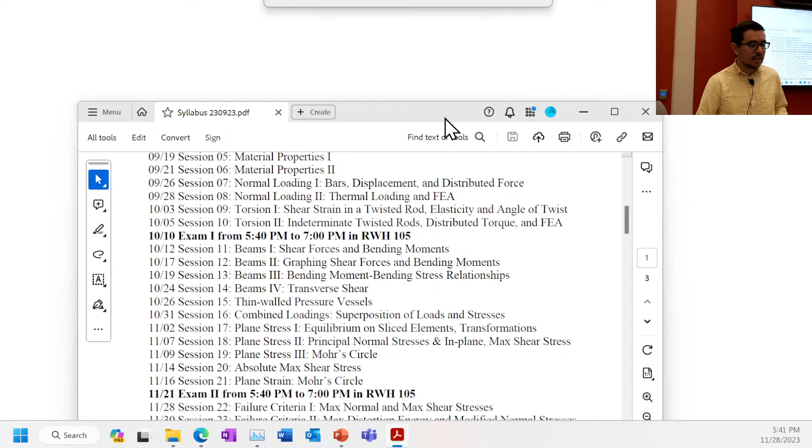All right, so administratively, we'll pull up the syllabus just for a minute to show us where we are and the progress we're making. As you know, we had exam 2 last week, and today we're going to do session 22 on failure criteria, and we'll talk some more about failure criteria on Thursday as well. Then we enter the home stretch. We have sessions 24 and 25 talking about beams, essentially. Key concepts we've talked about quite a bit: the stresses in the beam, transverse shear stress, the bending stress, and finally we'll get to figuring out what the displacement is. You'll be able to use tables you can find on the internet to do rough estimates for deflection. The last day of class will be the 12th, and then we'll have a review, talk about things, answer questions. But that's kind of what we're planning. All right, any questions on this?

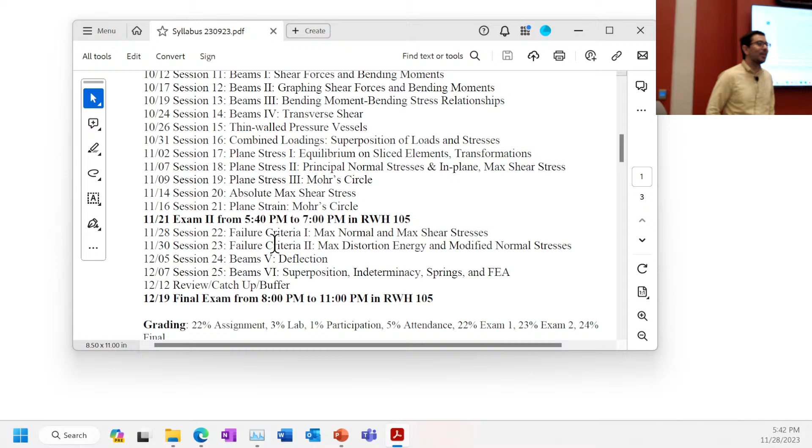Okay, I didn't know that was a way to get everyone quiet, by asking if there were questions. Yes? Do you have office hours between the 12th? Yeah, we can have office hours, sure. I'm not sure which days those would be, but I'll keep my normal office hours until we have the big one.

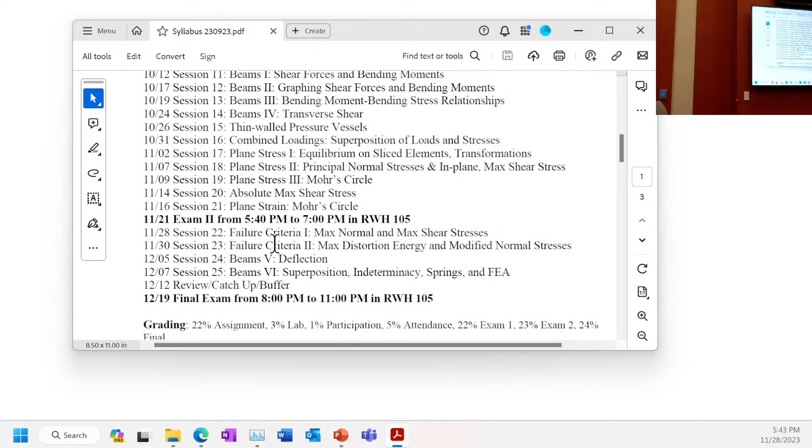Okay, any other questions? Are you okay, Jesse? You're looking at me with this face. I don't know, I was getting a vibe. Alright, okay, alright, so let's go. If I can get this off. Okay, and we'll come over here. Alright, yes, we're in it.

Okay, so today what we are going to review is a little bit about material testing and ductility. We've talked about these principles already. It may have been a little while ago, but you should be pretty familiar with them.

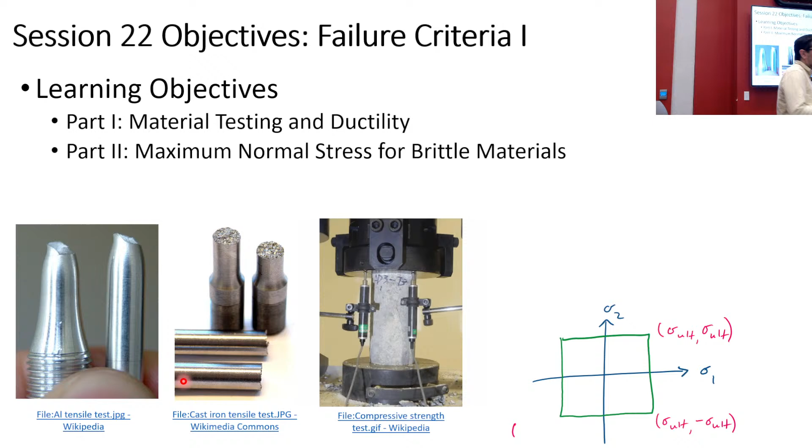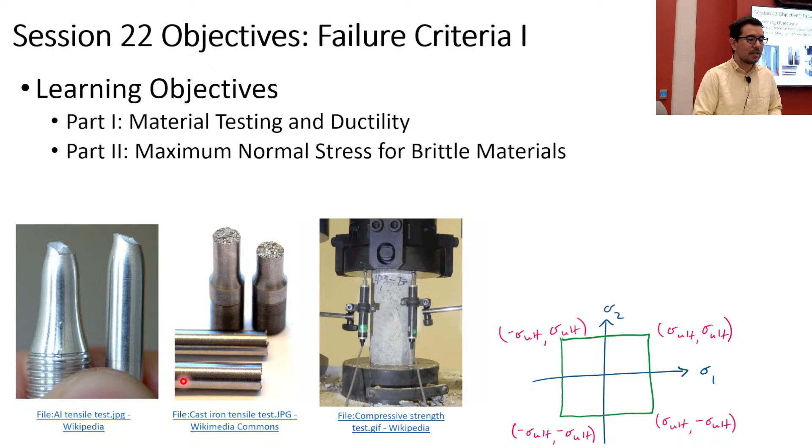And then we will talk about one criterion for deciding if something is going to fail, and that is using maximum normal stress. It's particularly useful for brittle materials, although, as we will say multiple times today, when you're looking at brittle materials and trying to figure out if they're going to fail catastrophically, be generous with your safety factor. There's a lot of variability, okay? But nonetheless, we do have some guidelines and some principles, and maybe a little demonstration too.

And then we'll get into maximum shear stress, which is applicable to ductile materials. Yes, Federico. Does it happen to be the chalk, the demonstration? Yes, it does happen to be the chalk. Have you seen this demonstration before? I'll find out. You'll find out. Okay, wonderful. All right, thank you for foreshadowing our demo.

So let's get into tensile testing, material testing, compressive tests. If you had to think about this, what would you say is the purpose of characterizing a material in a material testing machine? Why do we do it? Yes, Kevin: to see which materials are better suited for what kind of tasks and under what kind of loads and conditions. Okay, so to see which materials might be suitable for the anticipated loads we are going to have in our situation. Sure, okay.

Other thoughts? More specific ideas? Why do we test materials? Yes, Federico: to make sure they're safe when they're going to be used for their actual purposes, so no one gets injured. Right, so we're concerned about safety.

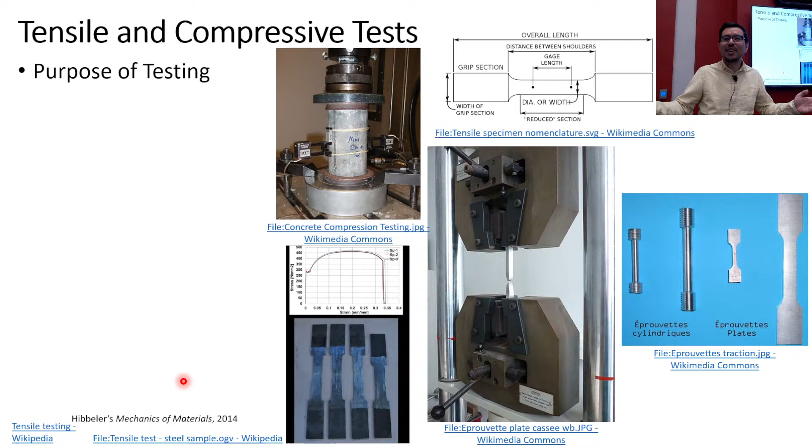Okay, and does this mean that if I'm going to build a table, do I put the whole table in the material testing machine to see how it's going to behave? I wish, right? We could get rid of this whole class if all you had to do is build it every time and have enough resources to test it every time. If it works, it works; if it doesn't, it doesn't. That would be a good way to go with infinite resources, okay.

So one of the things that we care about is figuring out what the intrinsic properties, the material properties are, so that we have an idea of the stresses and strains the material can handle before it fails or yields, right?

We also care about stiffness of structures, so we also want to know what the elastic modulus is, okay?

There's a difference between material properties and mechanical properties. When we talk about mechanical properties, we can expand that to think about what the structure's properties might be. But when we talk about material properties, we're just asking for a small chunk of material, and those are properties we can use to figure out what the structural properties will be. So there's a difference between structural properties and material properties, and sometimes we say mechanical for either.

This is a very powerful concept, right? So then you don't have to put the whole table in the material testing machine. You can predict whether or not it's going to fail.

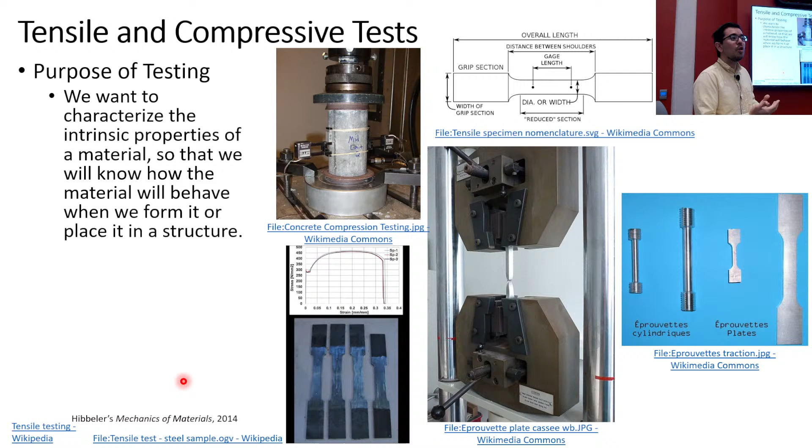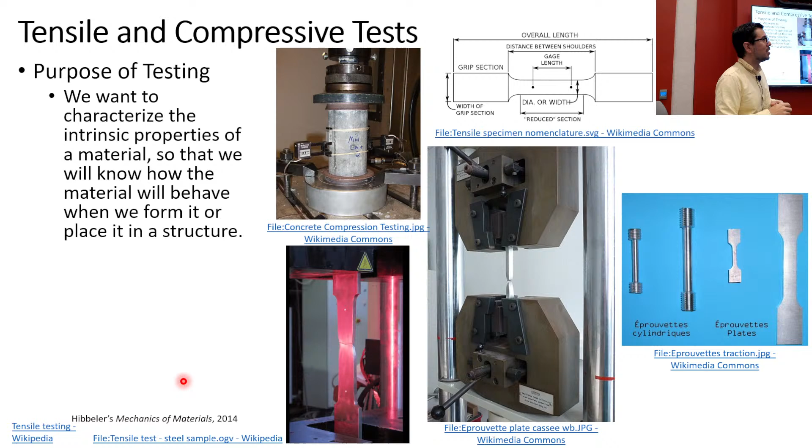And then you hope, then you say, well, my finite element analysis can't really handle telling me anything about, or I should be careful what I say, it's tricky to figure out what's happening when something fails. So that's where we go back to the safety factors, which we've discussed previously as well.

We also, in the case of tensile and compressive tests, we're typically interested in relating average normal stress to average normal strain. And you want to do this with a constant rate of strain.

At this point, how many of you have done the lab? How many of you have done the lab? Okay, good. Who has still to do the lab? Okay, all right, wow, okay.

So for those of you who have not yet done the lab, you will have the joyous experience of attempting to make a constant rate of displacement, to get the tensile testing to be more or less repeatable. And in our case, you were turning it and it was like 10 millimeters. We said try to keep it below 10 millimeters per minute, right? And we could also specify a normal strain rate instead.

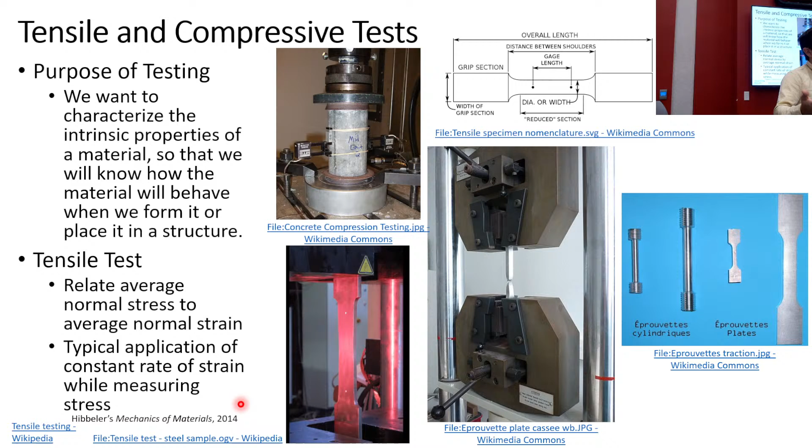So this is kind of a chance to be like, oh yeah, that's why I did that lab, right? Because I wanted to figure out the elastic modulus, I wanted to figure out the yield strength of the material. And then I could go about and think, oh, okay, this is what's going to happen with aluminum. And then if I'm crazy and I want to do something out of paper, this is how I could go about designing something out of paper. So that's what you've been able to do in the lab.

Now, for these measurements, we often use something with a constant cross-section. And we usually, when we're dealing with these metals, we assume that the cross-section is constant, that is not changing. Now we know it really is, why? Because we have the Poisson's ratio, right? But when you're calculating a stress over a particular area, and that area changes very, very minimally, shall we say, then we just say it's a constant, and it makes our lives easier.

When you start using the rubbery materials, then you start to look at things that are not what we call engineering strain, but they're called true strain, okay? And so then in that case, because what happens, right?

If the cross-sectional area is decreasing, and you keep the force constant, or for a given amount of force, what's going to happen to the stress? It's going to go up, right, Zach? Yes, it's going to go up, right? So then it becomes kind of consequential as you get to larger strains.

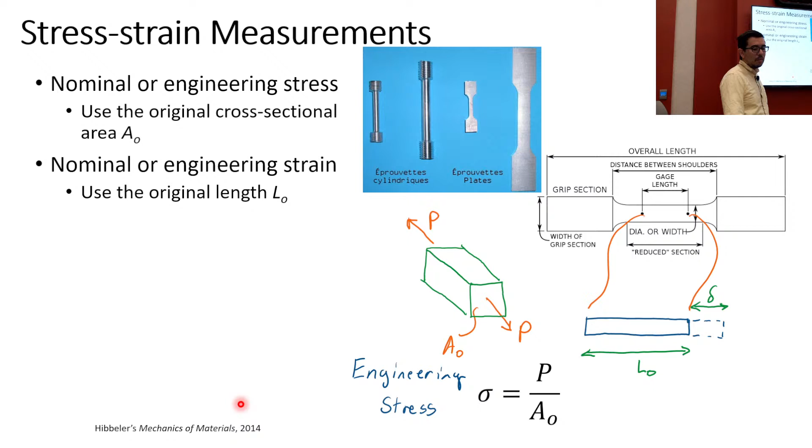But here we calculate our engineering stress, and we also typically use a nominal length, or the original length, when we're calculating out the strain, and we call that engineering strain.

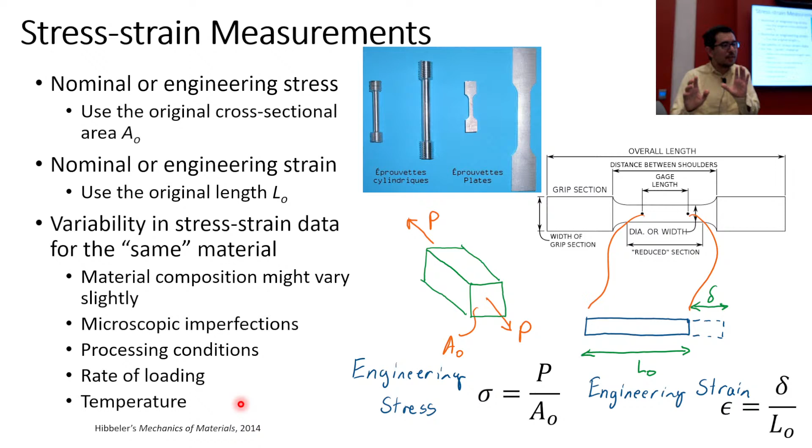There are a lot of reasons why we should take the data from material testing with a grain of salt, so to speak. Because it's very possible that there are some microscopic defects, or there could be even issues with the size of the sample or the conditions. Maybe we cut a particular material, we molded it at a particular temperature, and that's going to affect the properties that we're going to observe.

And then even during testing, the temperature could have an effect. Usually not so significant for metals at the temperatures we find in our everyday ambient environment, but for polymers in particular, yes, in our normal everyday use, outside, inside, it can make a difference.

And it's not completely true for metals either. In very, very cold water situations, if there's hydrogen trapped in a steel, you do have to potentially be concerned about that as well. You can have extra brittleness that can lead to premature failure. So if you're a Marine, or someone in the Navy, working on structures of that nature, you also have to be concerned.

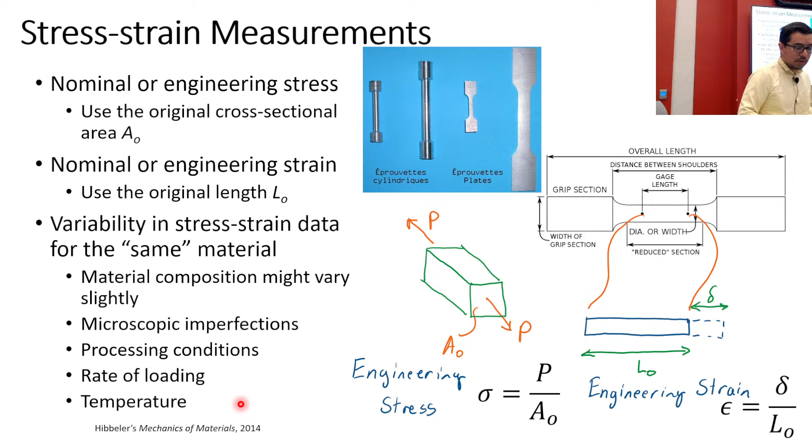This is not the first time you've seen a stress strain curve. At this point, you probably trust me more when I say forget about it here — when we say, is it the proportional limit? Is it the elastic limit? Is it the yield strength? They'll probably emphasize this more when you take material properties, but for our intents and purposes, we're gonna just use the yield strength, and this is gonna be good enough for us.

When you take design of mechanical components and cover fatigue, you will look more at the use of the ultimate strength. We don't talk about it that much here, but when it comes to fatigue, there are some back-of-the-envelope calculations based on the ultimate strength and yield strength that are useful for figuring out how many cycles of fatigue your sample can take.

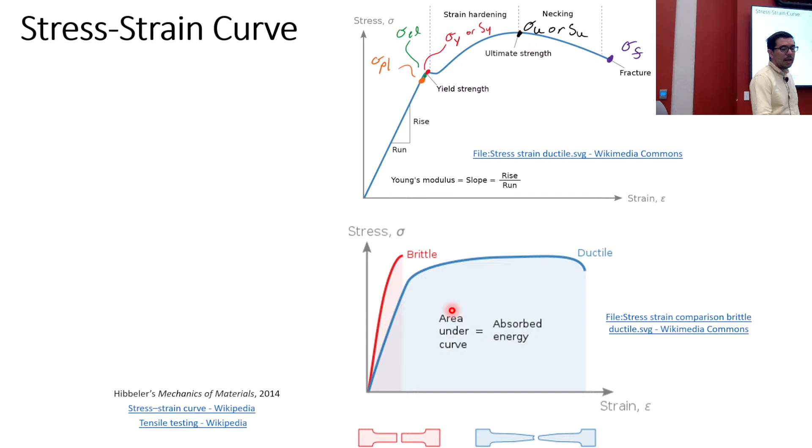We've talked in the past also about what happens with brittle samples and what happens with ductile samples. The ductile samples have more of a necking behavior, and there's more elongation before break. That can be characterized essentially as the length at break minus the initial length, divided by the initial length. That can give you some idea of how ductile something is.

And of course, we have a linear response here, and then we get into the plastic response here.

For the final exam, it will be cumulative, so it might be a good idea to review the strain hardening model. We talked about how we have linearly elastic, perfectly plastic behavior — that's where it goes up and then it comes flat. I think you can make a good song out of that: linearly elastic, perfectly plastic. The other one's a little more difficult because it's like linearly elastic, linear strain hardening, or linearly elastic, linearly plastic.

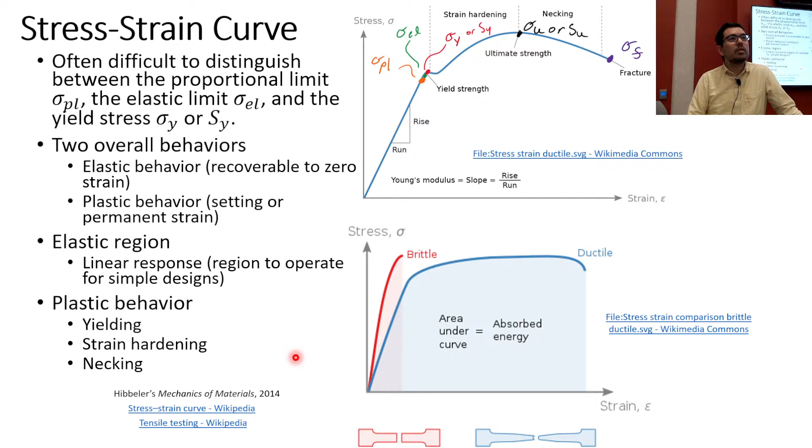Either way, those are kind of the two models that we've discussed. Exam one did do a little bit on that, I guess.

Someone, or a bunch of people, go through and calculate or measure these material properties, and they put them in tables, and we are grateful for these people. And then people with vested interest in you buying their material, they also give you these material properties. If you're a material scientist, you're excited about creating new materials. If you're a mechanical engineer, maybe you're also excited about that, but you're probably more excited about using materials that are already available.

Anything interesting? I don't have a particular purpose here, but is there anything interesting that you see in these tables? I have no ulterior motive here, just wondering if you all see anything interesting.

Certain materials do not have an ultimate strength listed. That could just be because they didn't test for it, or the data are variable, or this is a page from Wikipedia. That's not to say that they don't have one.

Ultimate strength can be a little tricky because cast iron is a brittle material, so it's going to probably yield pretty close to its ultimate strength. In that particular case, yes.

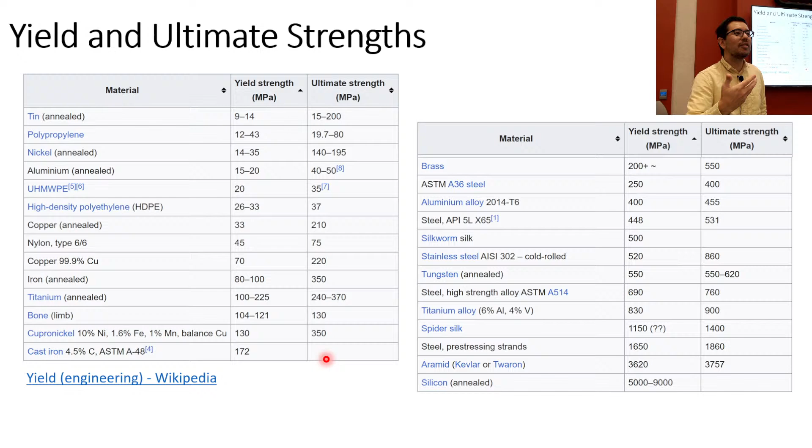Silicone is the rubbery stuff, silicon's not. Right, silicon refers to the element on the periodic table, and it is a wonderful semiconductor material. It's what's powering a lot of things in this room right now, and we can think about transistors and what they've enabled.

Silicone, as Paul correctly pointed out, is a rubbery material. It still has silicon in it—silicon is the backbone of the polymer chains. Normally, with polypropylene, polyethylene, and others, carbon is the backbone, but instead of carbon, now you've got silicon in there, and you still have different groups attached to it.

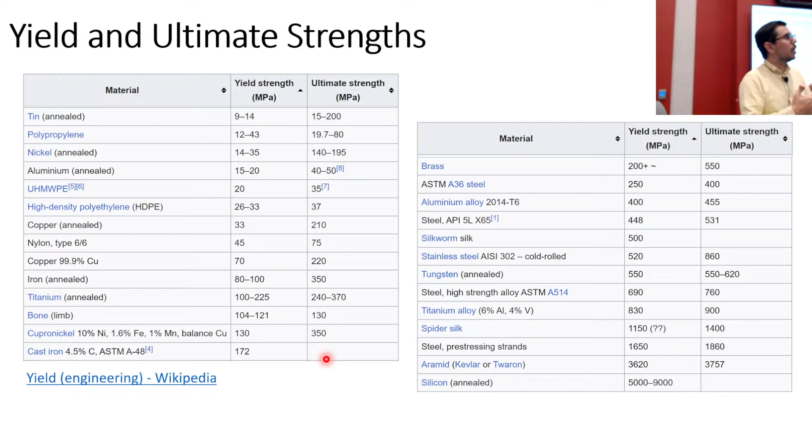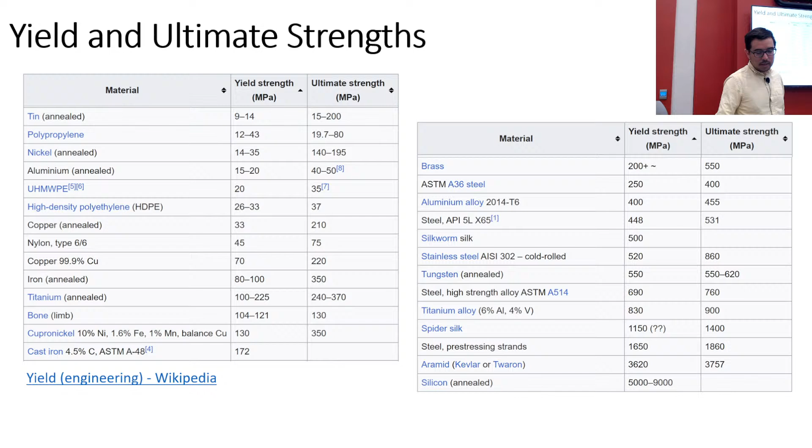Silicones are not thermoplastics; you have to use a catalyst or some type of cross-linking mechanism to get the polymer chains to intertwine, lock, and become more rigid. So hopefully when you talk to people and they say silicon, they mean the element, and when they say silicone, they're referring to a silicon-based polymer.

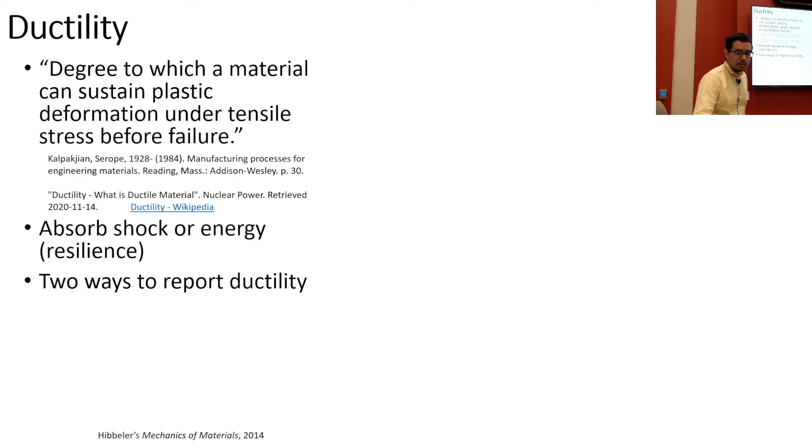Ductility can be described in terms of measuring the final length minus the initial length, divided by the initial length. If you multiply by 100%, you get a percent—that's one way of doing it.

The other way is to look at the reduction in area. When you see a brittle material break, it didn't have much of a chance to neck, so the cross section stays pretty much the same. But if it's a ductile material, it pulls out and oozes very nicely—or not so nicely. It doesn't have to be that dramatic to be ductile.

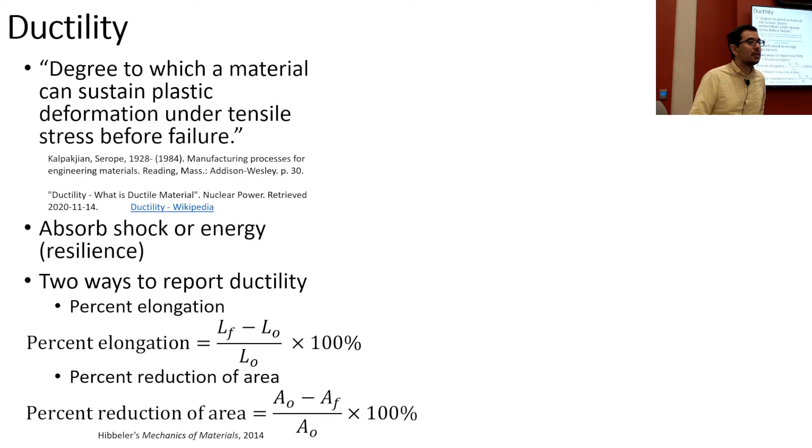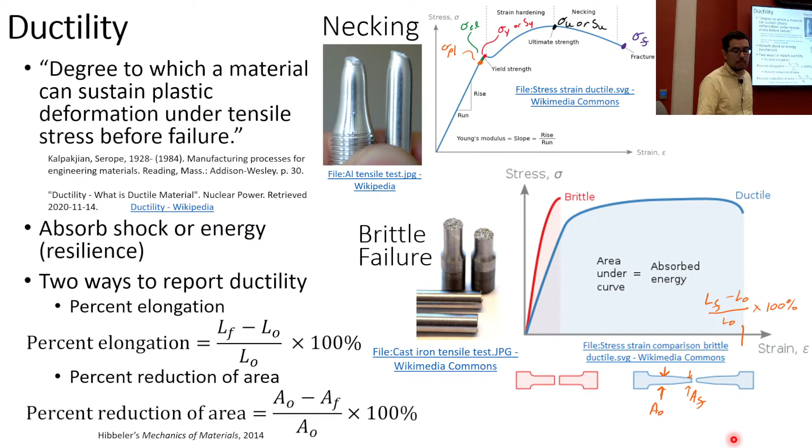With that, we have necking behavior and brittle behavior, which we just talked about. We can write out the percent elongation at break, and we can also think about what the percent reduction of area might be, and report those.

So here's a question, I think I've said it before: for a given material, which is typically stronger, particularly for ceramics—the yield strength or the compressive strength? Which is typically stronger?

Which is typically stronger, compressive or tensile? A material like ceramic doesn't like compression—wait, why do you say that? Because of the properties of the material. If you step on a ceramic, it will break because of shear; brittle materials don't like shear. We'll talk about this in a minute. Brittle materials actually do much better in compression than they do in tension.

You can think of columns in Athens, Greece, or Rome. Those are sustaining lots of compressive force, and they've stood for a long time. They did a nice job making them fat enough so that they don't buckle.

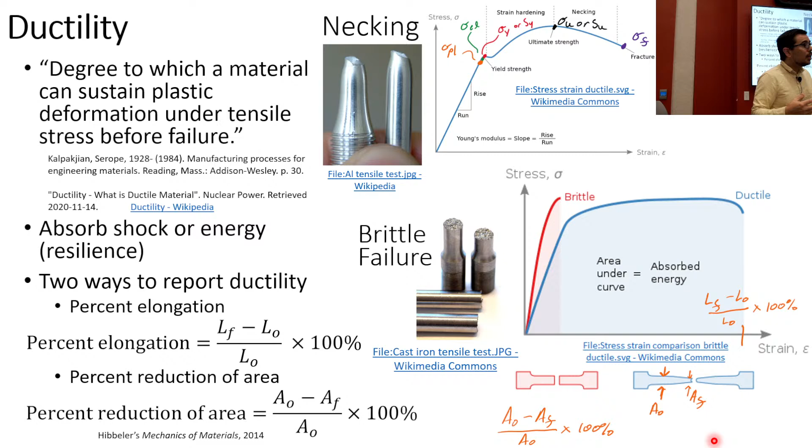So if you're compressing something very slender, and it will cover this more in DMC, often it's covered in this class but we're not getting to it—if something's very slender, it's elastic instability, not inelastic, that causes it to buckle out. So typically, materials are stronger in compression than they are in tensile loading.

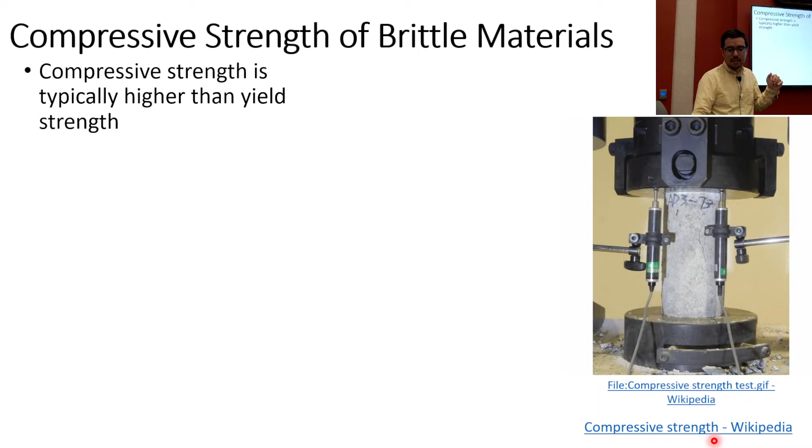What does it look like on a stress-strain curve? Most of the stress-strain curves I've given you have been tensile loading—they're in quadrant 1 of the stress-strain graph. But what does compression look like? Which quadrant does it live in? Quadrant 3, right?

So if I'm drawing a stress-strain curve and now include compression—there are no numbers here, but it goes down further. Often this is how I'm drawing it, so you can have this behavior, but often it will be a little more brittle—it'll be like bam, and that's it. I'm going to put a little bam there. It breaks.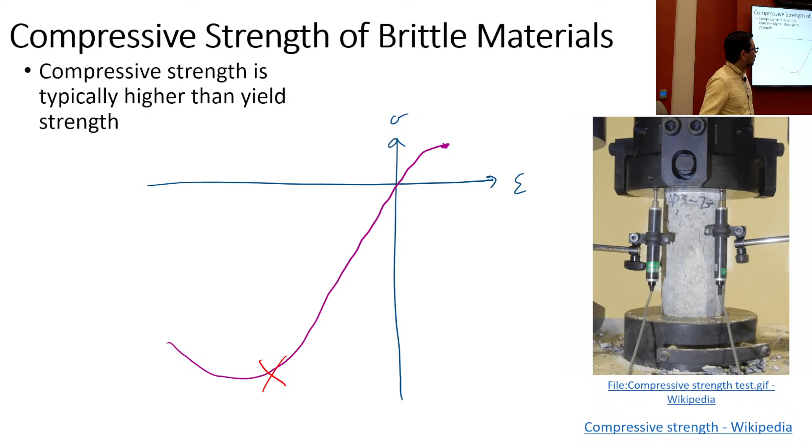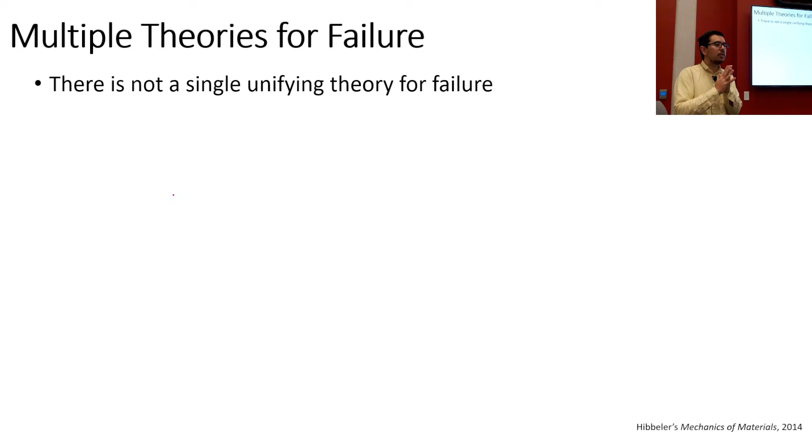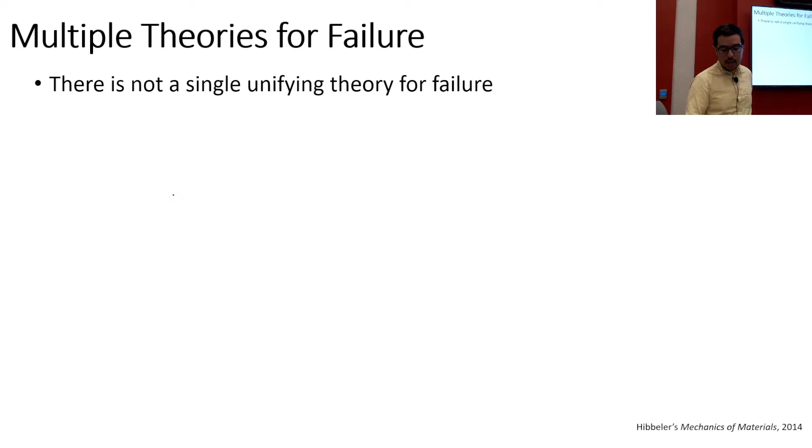If we begin to use what we've discussed with material testing, we can begin to create models for failure. Who doesn't want to know if something's going to break before they use it—at least if they're building it and liable? Most of us, when we build things, just have a sense—you get a few 2x4s, put it together, it's good enough, and we're usually over-designing. But as you move to applications where cost and weight matter, you'll want the opportunity to do calculations.

These models—we're going to cover essentially 4 models, 2 today and 2 on Thursday. They don't account for everything; it's very hard to account for everything. That's why if it's really precious to you, you should do some testing or inspection. We're going to tell you when you should use one over the others—you get that for free, in a minute.

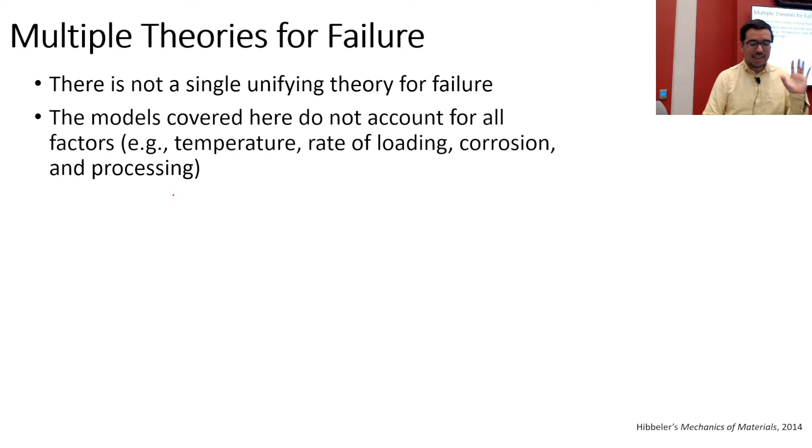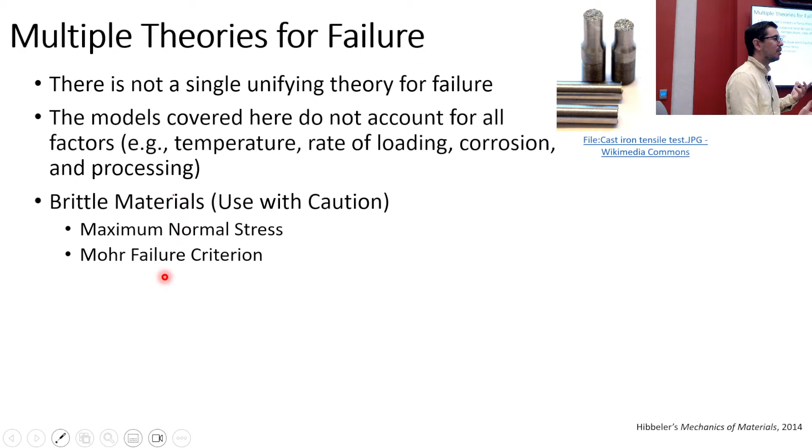Here it is: if you have a brittle material, use maximum normal stress. On Thursday we'll talk about Mohr failure criterion, which is a variation on maximum normal stress, and we say use caution because there's a lot of variability, especially with brittle materials.

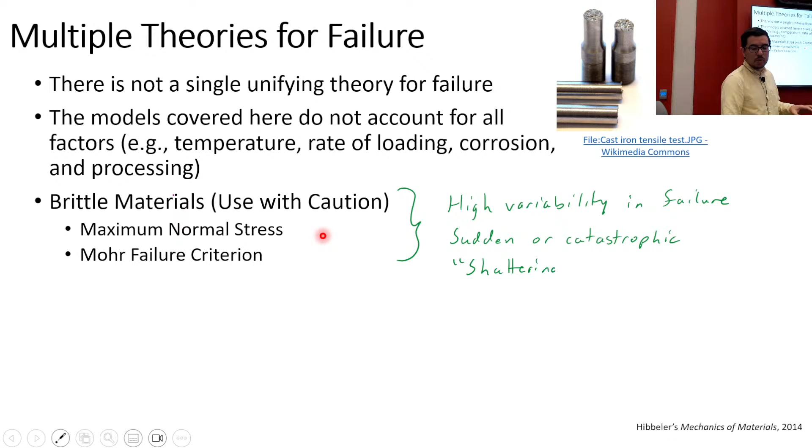But if you're using a ductile material—which is not a brittle material, just so you've got that—

Has anyone watched Karate Kid 2? Oh, that's right, there's a new one—what's that called? Cobra Kai, yes. Jackie Chan? Wait, is Jackie Chan in Cobra Kai? No, isn't that Ralph Macchio? Anyway, at the beginning of Karate Kid 2, it ends Karate Kid 1, and there's some breaking glass, unfortunately. It looks very painful—don't do those experiments.

That glass is a brittle material. But ductile materials—and cast iron is also a brittle material, even though it's a metal—it's what you call high carbon steel.

For ductile materials, we're going to use maximum shear stress, and then on Thursday we'll use something called maximum distortion energy theory. It's nice that many of the materials we care about for our structures are ductile. Of course, people in civil engineering care a lot about concrete—we love our concrete, but not the amount of carbon required to create it. We're grateful that many of the structures we're looking at use ductile materials, so we'll be okay using these different theories.

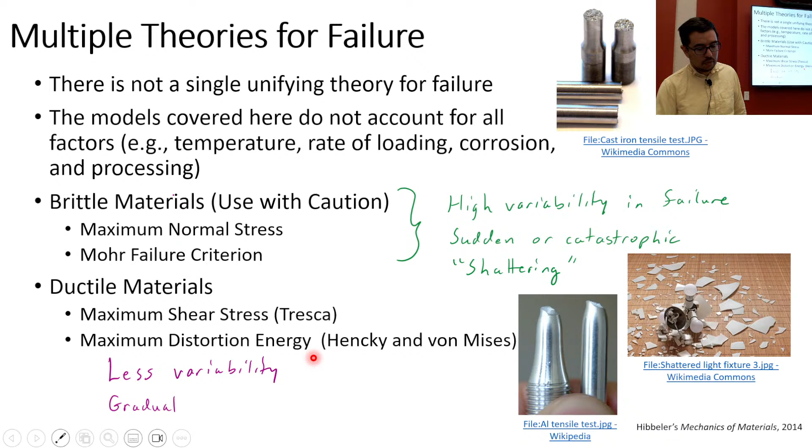So why don't you take a few minutes, if you haven't already, and answer question number one. This is just a move-it-to-the-right-category exercise.

As you're doing this, which of these do you think are controversial? Epoxy—epoxy, okay.

Has anyone used a ductile epoxy? Anyone? I guess you could engineer a composite with it. I think epoxy is typically... what's interesting is there are two-part polymers that cross-link that are ductile, but epoxies are the ones you go into. Anyone go into Home Depot and head right to the adhesives aisle? Isn't that one of your favorite aisles? You're glad everything's capped because you know it would smell horrible if it weren't.

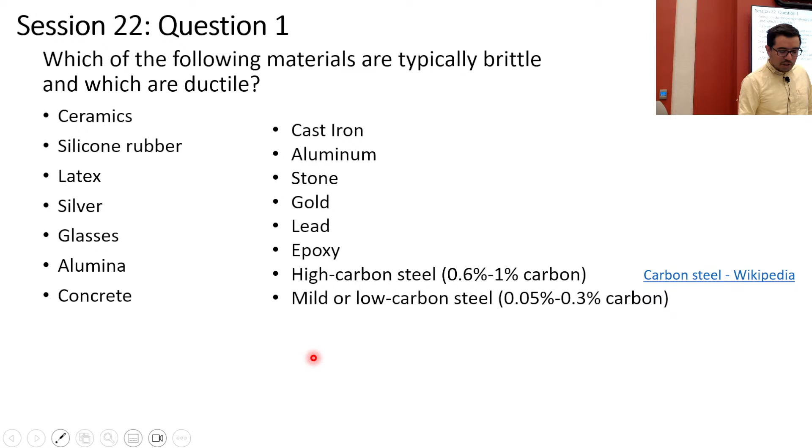What I was thinking—latex. Latex is very temperature dependent. Silicone, the rubbery polymers, are very temperature dependent. And if you had to choose a brittle polymer, which one would you choose? They're different grades, but—ABS? Okay, I can see it. I don't think of it as super brittle, but there's one polymer I think is usually more brittle than the rest. ABS can snap, I agree, especially when it's 3D printed.

Natural rubber? No, that's very ductile. What's another one—a brittle polymer, anyone? It can often take a lot of impact though. PVC? I don't consider polyvinyl chloride to be that brittle. It's actually kind of softish, but if you're sawing at it or whatever, it has some brittle qualities, especially if it's old.

I was just guessing. That's a good guess. Polystyrene? Yes, that's actually probably more brittle than the one I was thinking of, so that's a good one. Where do you see polystyrene a lot? A lot of packaging, yes.

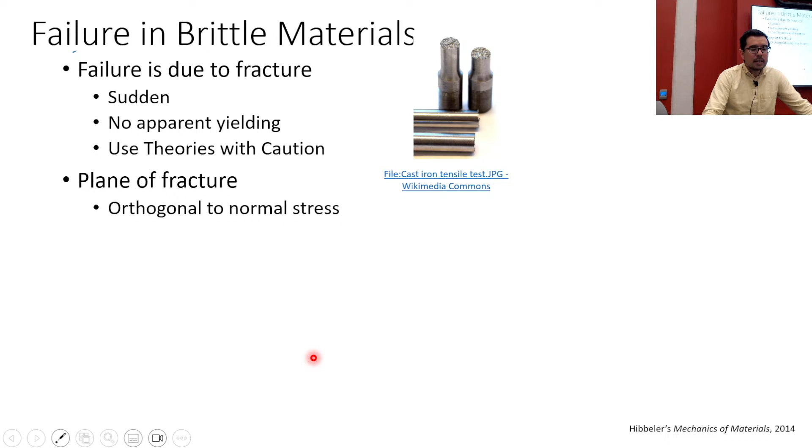Here's something interesting: the fracture surface is orthogonal to the normal stress. You see here how these have this kind of flattish, sharpish surface. That shows that it was a brittle fracture. And if it's a brittle material... well, actually, we'll just leave it at that.

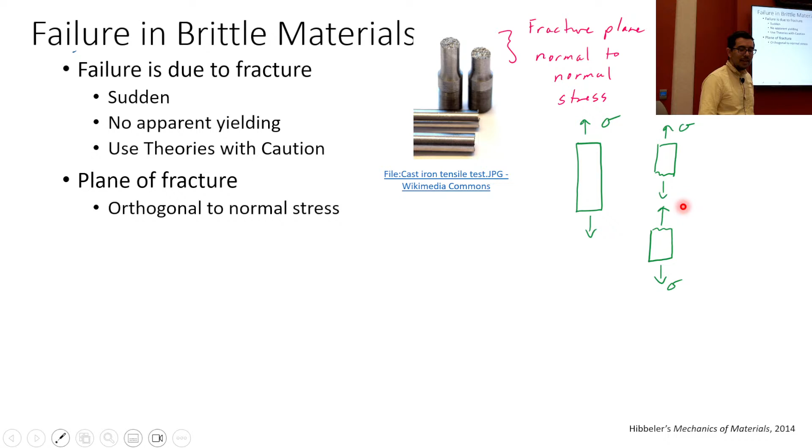We separate it in this case, right? This is not an actual breaking, right? This is just saying that there's a stress inside. Or maybe it is an actual breaking.

What does the Mohr circle look like for uniaxial loading? Like this. This is uniaxial loading, so sigma 1 has got a value. And what are sigma 2 and sigma 3? Zero, right, because it's uniaxial loading.

So what do you care about? Do you care about the radius or the diameter of this circle? If I say we care about maximum normal loading, which do I care about? Radius? Well, I guess I care about both since radius and diameter are related. But I care about the diameter because I want to know the maximum normal stress. The radius would give me the maximum shear stress, which matters for ductile materials, but right now we're talking about brittle materials, so I care about being out here.

Now, let's say I have a material under pure shear. Are there any normal stresses present in this shearing shaft? No. For an element that looks like this, if I draw the shear stresses, they look like this, right?

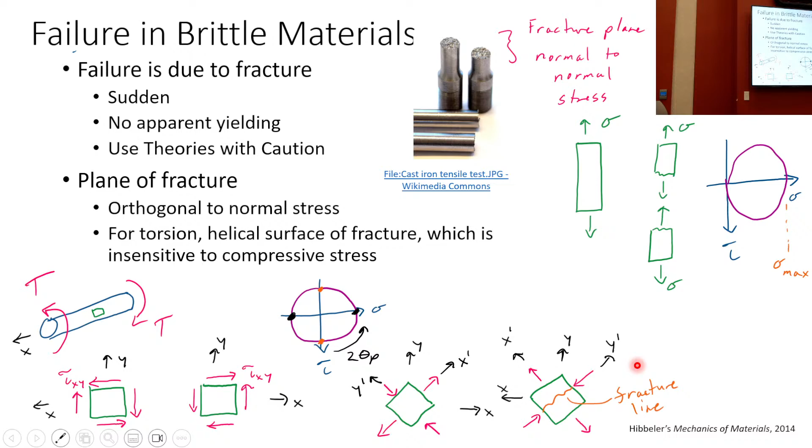If I believe what's happening or what I say here, the fracture should happen along a plane that is orthogonal to the maximum normal stress. Because the material is typically weaker in tension than it is in compression when it comes to a brittle material, we're going to be looking at the one where we have tension. These normal stresses are in compression, and this normal stress is in tension.

So now, if we go back to this original configuration, and we have a brittle material, you tell me, what is that fracture surface going to look like? Or what's the angle of that fracture surface going to be? 45 degrees.

Okay, who thinks they can catch a piece of chalk without it breaking before they get it? Okay, Chris Castro. Oh, okay, all right, you trying to help? Okay, we'll go get him, Chris. I don't know your name, but you ready? Oh, saved, saved, I'll try again. All right, here we go. No, that's not gonna... that's all right. I'll try one more time. Did you save me? That was on me, but it didn't break. Okay, go ahead and get it then.

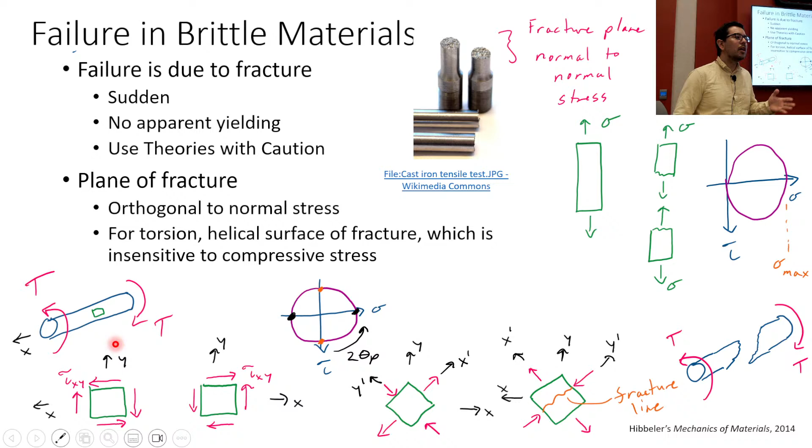All right, so yes, if you twist, this is what you should get, a nice kind of 45 degree surface. Let's keep going, any questions on this? Okay, this is the criterion of, okay, brittle materials, yes, and it's maximum normal stress. That's what we care about. Now, there's another way, right? We've used our friend Mohr's circle and stress transformations to understand what's going on here, but there's another way of looking at this, yet another plot. Okay, so look.

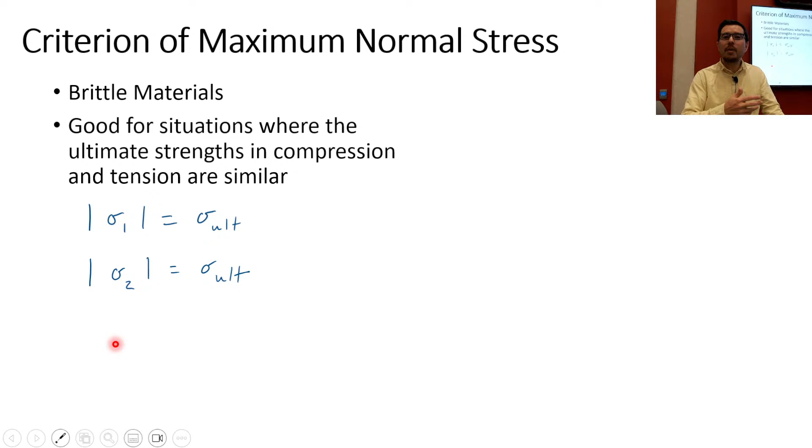If sigma 1 and sigma 2, the principal stresses in a plane, we're assuming sigma 3 is 0, because in this class we pretty much do that. Sigma 1 and sigma 2, if they are equal to the ultimate tensile strength or the ultimate compressive strength, that's when we think we're going to have failure. So absolute value of sigma 1 equals sigma ultimate, this is when we get failure. This is the condition or conditions for failure.

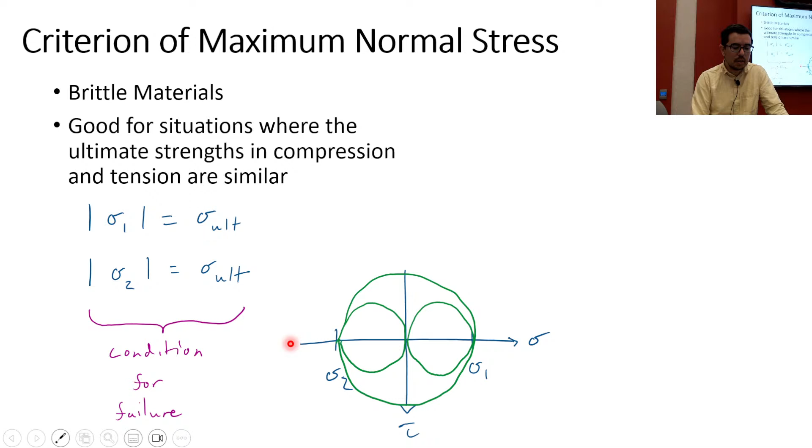So on Mohr's circle, if I draw a Mohr's circle, what do I get? I get something like this. I've got my sigma 1, my sigma 2, my sigma 3 is right here in the middle. I can draw the small Mohr's circles inside, but what I care about is whether or not sigma 1 and sigma 2 are, relative to the ultimate strengths. Maybe it should be a little bit more over here for compression than over here, but you get the idea.

And you know, we still have football going on, right? I guess college is wrapping up, but Champions League today. There was Champions League today. Champion League, okay. Yeah, and there's the NFL and everything. So I kind of think of this as a field goal, all right? If you make a field goal between these ultimate tensile and ultimate compressive strengths, you're good, 3 points. In rugby, I don't know, they do field goals too, right? To try... that's a touchdown, they do some, I don't know how many points they just get, kick it, I think it's 2 points. Right, one of the great, actually, Adam Korsak, the great Rutgers punter, who is gone now, set some records and stuff, but he was a rugby player. I think he played rugby in Australia before he came here.

Okay, so now that's one way of looking at it. The other way is to look at it in terms of what's called a sigma 1, sigma 2 plot. All right, so this is going to be new. What do you think sigma 1, sigma 2 means? It means that the axes are sigma 1 and sigma 2. So now draw in your mind sigma 1 going in the horizontal direction, sigma 2 going in the vertical direction. If you have to not fail, your goalpost becomes a box. All right, you see this? These are the 4 corners.

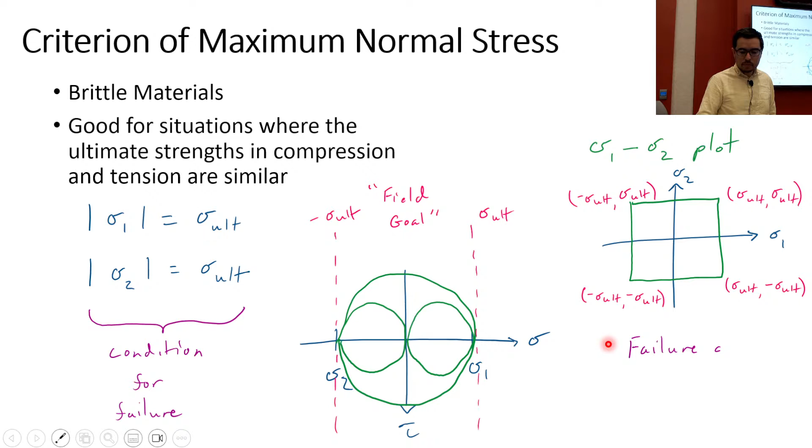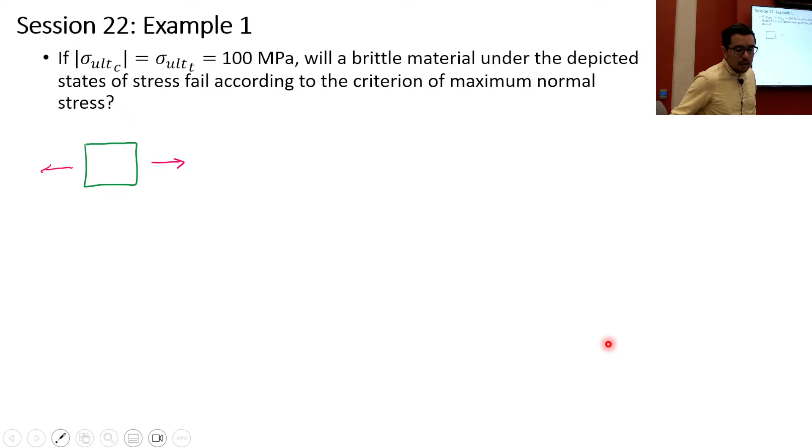All right, so we're without a bunch of time, okay, because we've been having fun, or at least some of us have been having fun. Some of us have probably been bored stiff, but others of us have had fun.

What you get to do, if you think about a load, is write out what sigma 1, sigma 2, and sigma 3 are, right? And so this is for a uniaxial load, with 50 megapascals. And in this case, if the ultimate tensile strength and the ultimate compressive strength are the same, and they're 100 megapascals, we can see that we're going to be inside the box, and we have no failure.

Now, if we have a system that has shear stress on it, it gets a little more complicated. We have to think, what does Mohr's circle look like, all right? And will the principal stresses be in or out of the box? Okay, and in this case, what are they?

Yes, Chris. This is for the previous slide, the sigma 1 and sigma 2 plot. Is it always going to be square or can it be a rectangle? It can be, so tomorrow or Thursday we'll talk about something that is not a square, but it's off-centered. And actually then there's some diamonds that we're going to talk about in a minute. There are a bunch of, and there's ellipses, different shapes, right? But for maximum normal stress theory, it's a square.

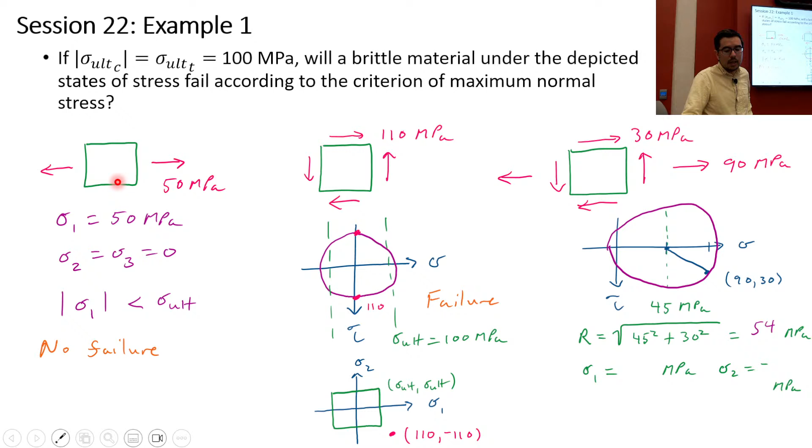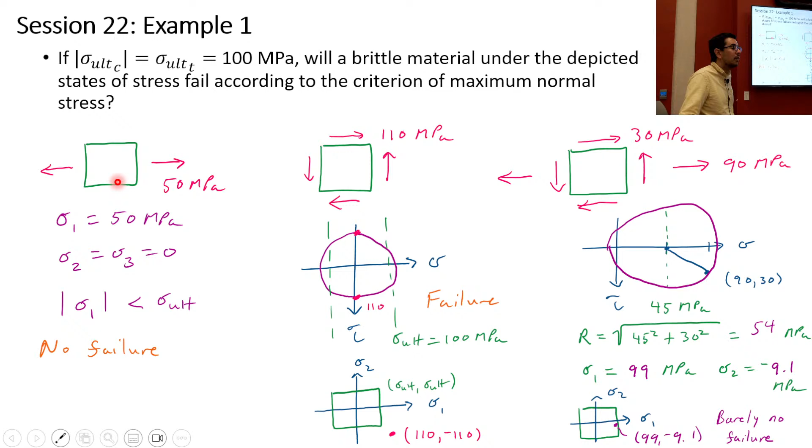If you have a different type of loading, some type of combined loading like this, you do the Mohr's circle, and you look at what the principal stress might be, and it's just shy of what you would have for failure. So you're barely in the box, barely no failure.

So you'll get a chance to revisit a classic problem that we've had with some combined loading, and look at what the shear stress is. As a hint, at location A, what type of stress is this experiencing? Yes, okay, so it's experiencing a transverse shear stress from which load?

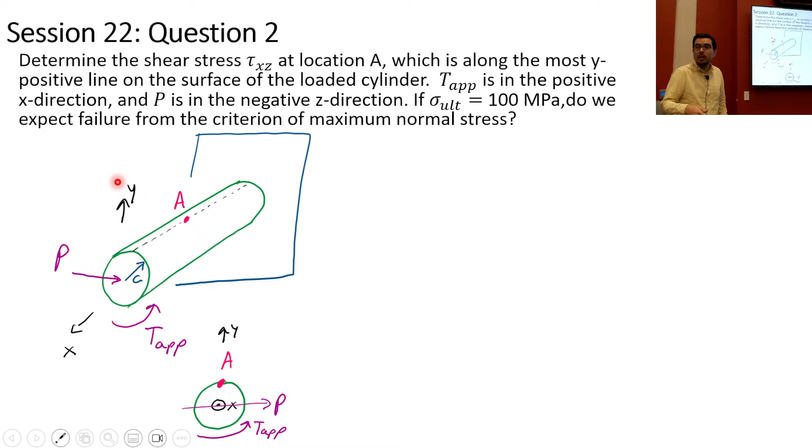Transverse shear stress from what? From P, right? And it's on the neutral axis. And it's going to experience a shear, a twisting shear from T app. So that's the shear stress that you're caring about, and then we had to figure out what's happening with an equivalent set of normal stresses.

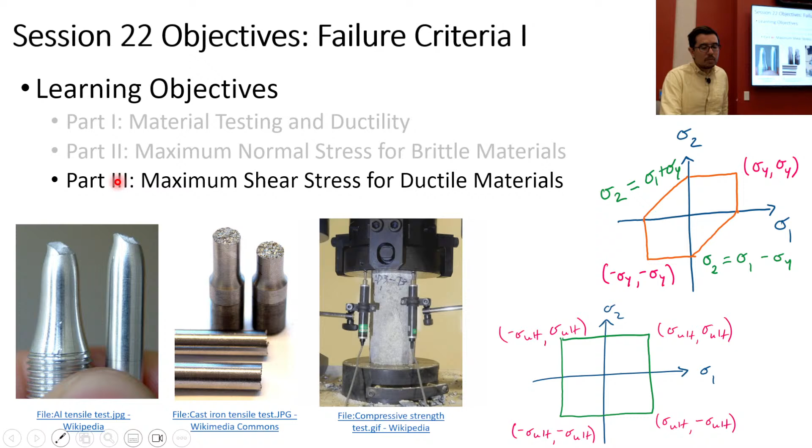Okay, so now, maximum shear stress theory is for ductile materials. This is going to be applicable to ductile materials, like we just said, and was first discovered in 1868. That's not that long ago, really, if you think about it. We've been breaking materials for a long time, but to have theories that were only developed in the last couple hundred years, that's pretty interesting.

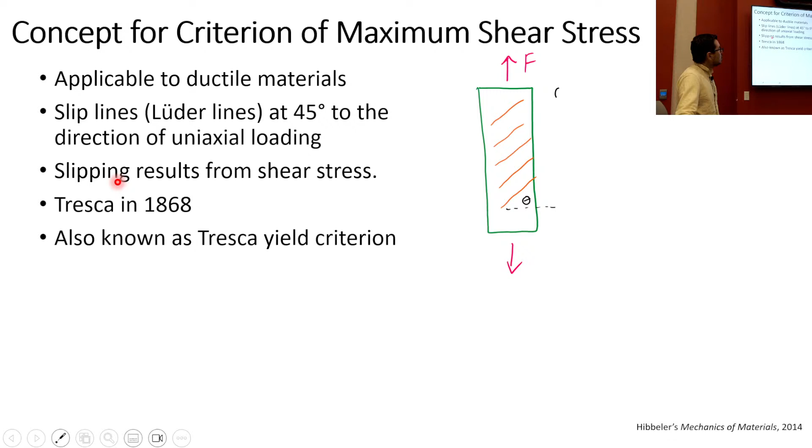So in this case, if you have uniaxial loading, you can see in some samples you actually see what are called Lüder lines, and they're at 45 degrees. And this is the same Mohr's circle that we had a few minutes ago when we were talking about maximum normal stress. But now, what do we care about? We care about the maximum shear stress.

And we can calculate out what that is, right? It's going to be half of the diameter. And we have to rotate the element 45 degrees, or we rotate 90 degrees on Mohr's circle. And if we think about what's going on, we get to a state of maximum shear stress. Now, something to keep in mind, when you get maximum in-plane shear stress, this doesn't mean that the normal stresses are zero.

That's the nice thing about principal stress, is that the shear stresses go to zero. Like here, in this state of maximum in-plane shear stress, we have an absolute maximum shear stress. We still have normal components, and they happen to be sigma average, the average of sigma 1 and sigma 2.

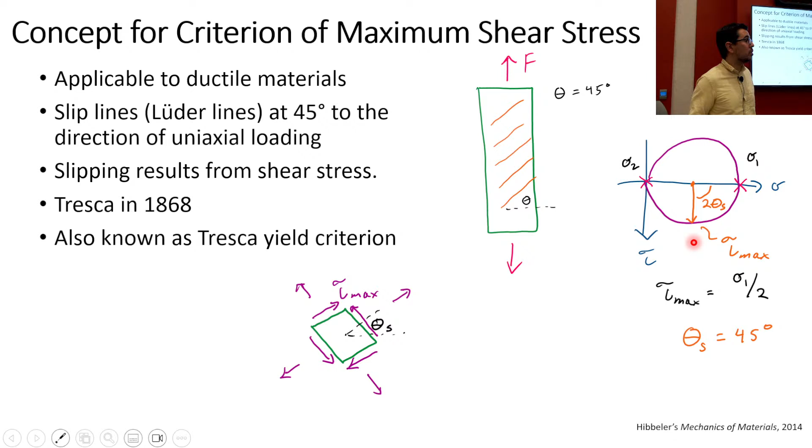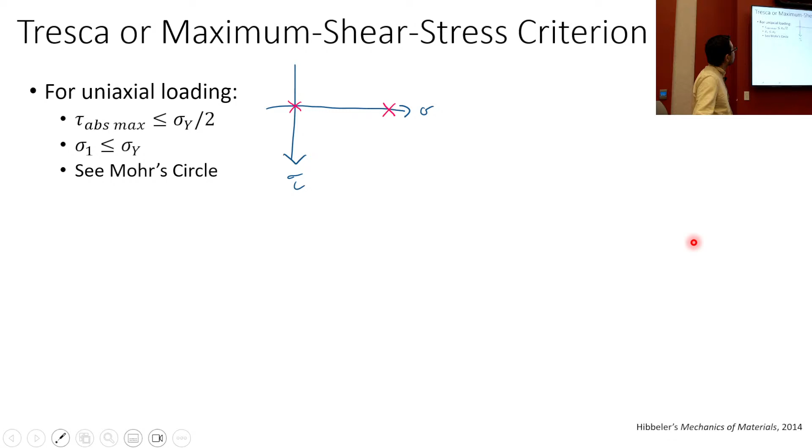For uniaxial loading, what's interesting here is that the absolute maximum shear stress ends up being half of the yield strength. So you're like, wait, what's going on? You're telling me all this time that we report yield strength, but it's really the shear stress that dominates? At least maybe some of you are thinking that. And it's like, yep, that's the truth. But we still report the yield strength because we know what that loading condition is. It's uniaxial loading, and uniaxial loading is good for testing both brittle and ductile materials.

So it's for ductile material we care. When we have uniaxial loading, this is what the Mohr's circle looks like, and this is what the absolute maximum shear stress looks like. And the absolute maximum shear stress is half of the normal stress and principal stress. So this is kind of repetitive, but this may be a little bit counterintuitive.

So on the flip side, someone says, here's the yield strength of this ductile material. What is the absolute maximum shear stress it can handle? Boom, you say divide by 2. That's it. Divide by 2.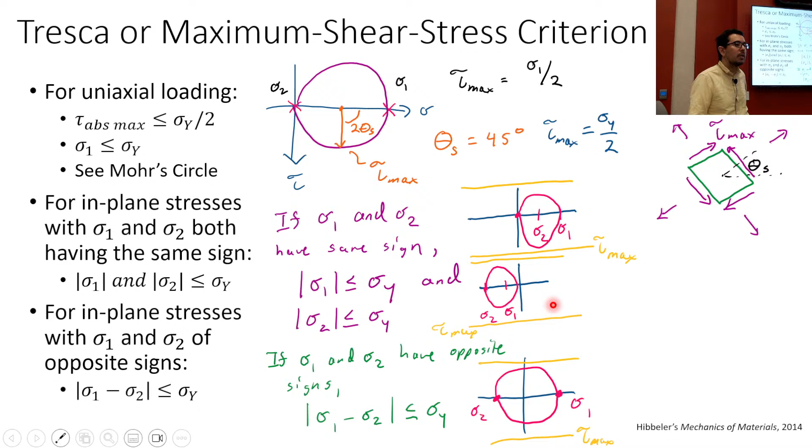So that's what Mohr's circle looks like in different scenarios, like this and this. And you could say, oh, this field goal is sideways. Fine, you've got to be within the sideways field goal. That's fine, or stay in the lanes if you want.

What does the sigma 1, sigma 2 plot look like? Well, this behavior over here is pretty similar. So if you're in quadrant 1 or quadrant 3, we have the boxes.

But look, what is this? Sigma 2 is equal, or let's say if I'm in these other boxes, right? Remember, I have a sigma 2 and a sigma 1. I can say sigma 2's got to be less than or equal to, if I get rid of the absolute value, or sigma 2 is greater than or equal to sigma 1 minus sigma y. Wait, the slope is 1. Slope is 1, right? Between sigma 2 versus sigma 1, the slope is 1. What does that mean?

Boom, you've got a diamond. So instead of it being a box, you have a straight line here.

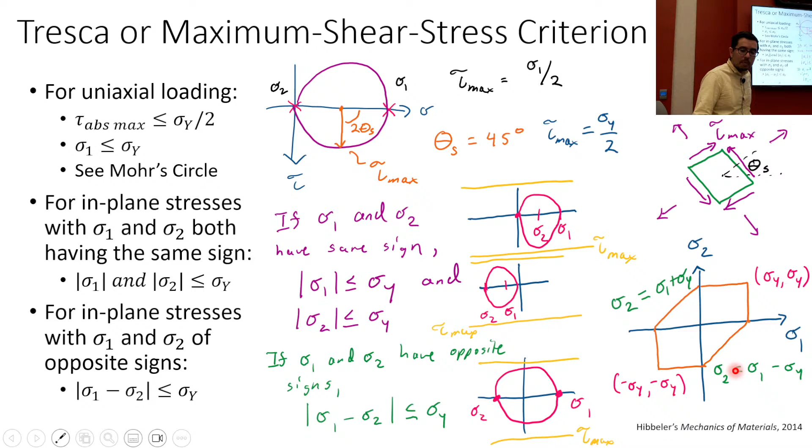Okay, I am running out of time. We got 9 minutes. But this is the same problem that we just did, but now we're looking at whether or not we have failure due to maximum shear stress. And here we have the yield strength of 100 megapascals. So this does not fail.

Why? Well, you could look at it from a couple of perspectives. You could look at it as, what's the maximum shear stress that this material can handle? You can handle 50 megapascals. What's the maximum shear stress here? 25 megapascals, right? Or you can look at it as, oh look, this sigma 1 is less than the sigma yield, so yeah, we're good.

When you start to get to these types of situations though, where you have shear, that's when you start looking at, oh wait a second, I need to know something about the maximum shear stress that this ductile material can handle. And it's only going to be half the yield strength. So now our lanes go right through the Mohr's circle, and this is not a condition where you're going to be safe. There's a good chance you're going to have failure. And if you plot this on a sigma 1, sigma 2 plot, you're out here. You're outside the diamond.

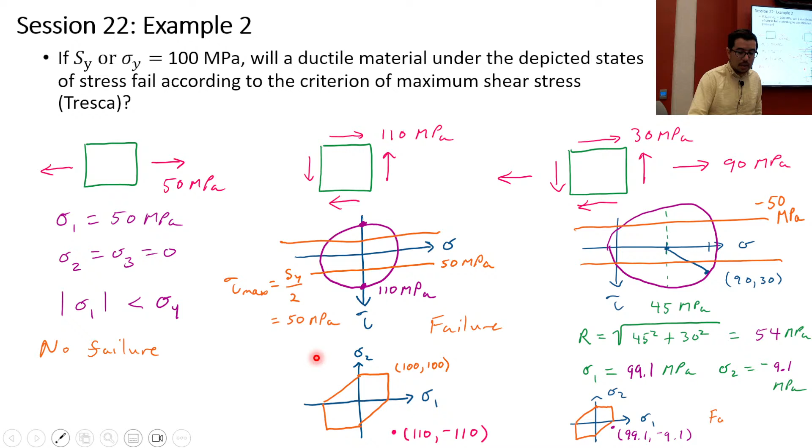Now, one more example. Here we have combined loading. And in this case, again, we care about what is the absolute maximum shear stress. And you're getting a clue that this is not going to look good. We're outside the box again, or outside the lanes, and we're going to have failure.

So before the question, one thing to think about is which of these is more forgiving? So now we talked about maximum normal stress theory and maximum shear stress theory. Which has a bigger area on a sigma 1, sigma 2 plot? Which one is more forgiving?

The first and the third quadrant, they might be the same, okay? In general, which is going to be more forgiving? If you had the same compressive strength, same yield strength in tension, same ultimate tensile strength as the yield strengths, the diamond fits inside the box.

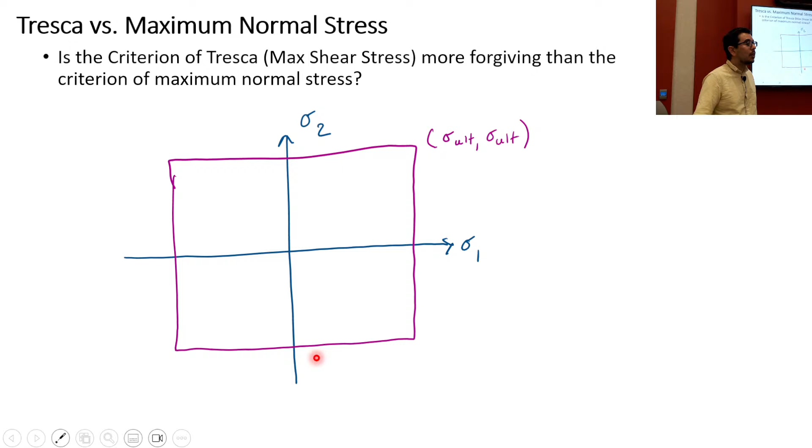And coupled on top of that, ultimate strengths are usually higher, and I guess I kind of lied a little bit at the beginning. We do care about the ultimate strengths in the compressive materials because they're so close to the yield strengths essentially. And so if you're drawing these boxes, what you'll see is that the maximum normal stress theory is more forgiving than the maximum shear stress theory.

So question 3 is another combined loading problem that we've seen before. And you get that state of stress, and then you go about and say, okay, do you expect to have failure from that criterion? Any questions? Any questions?

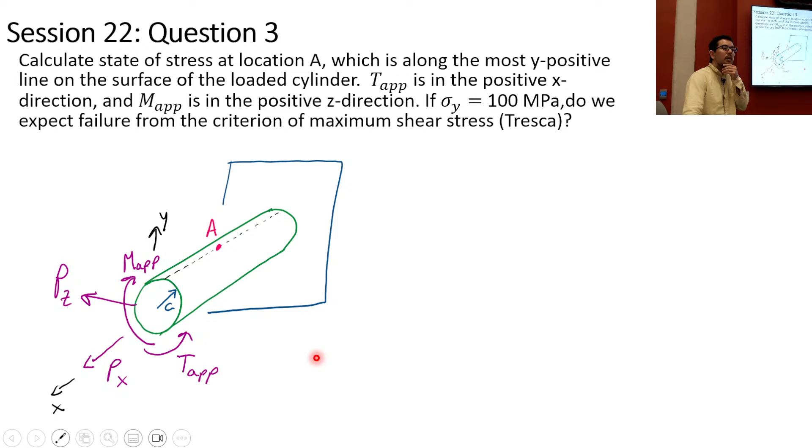Okay, yes, go ahead. Yes. Because, well, even if the ultimate strengths are the same as the yield strengths, if I bring this out, this diamond would cut from here to here. And so the maximum normal stress theory covers a larger swath of area.

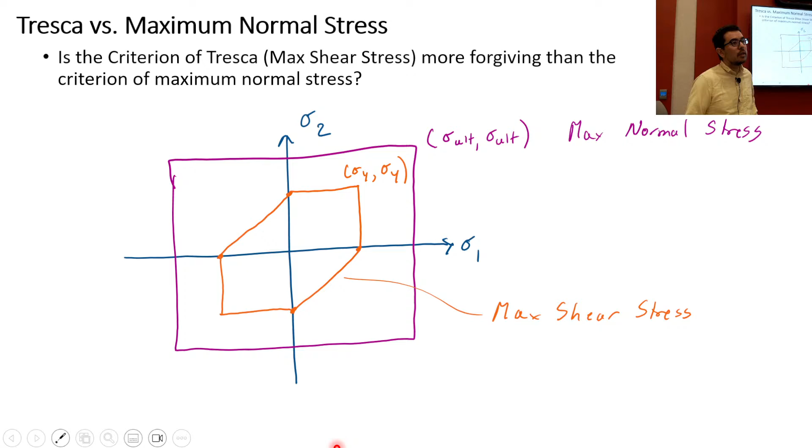Good. So we've covered material testing and ductility. We've covered maximum normal stress for brittle materials and maximum shear stress for ductile materials. Okay, and now it's everyone's favorite time.